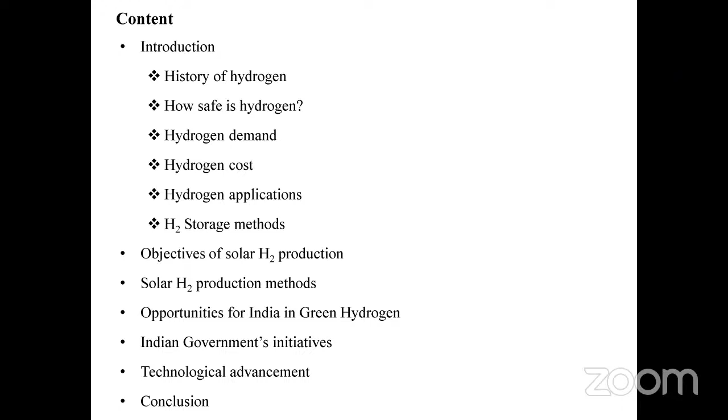Coordinators have given me responsibility to cover this topic, the solar energy in hydrogen production. Before that, I know most of the fundamentals have already been covered, so I will talk for about 60 minutes. Dr. Vishwanath, you have given me 60 minutes now, right? Yes, sir. Okay, so within 60 minutes, I would like to try to cover some basic things, and some technology involved, in fact the technology of solar energy involved in hydrogen production.

Right? Yes. Okay, so I would like to cover a brief history of hydrogen, how hydrogen is safe, hydrogen demand, hydrogen costs, briefly, since most of these things have already been covered in the last 5 days. This is the last day, and this is my talk in the last session of this short-term training program.

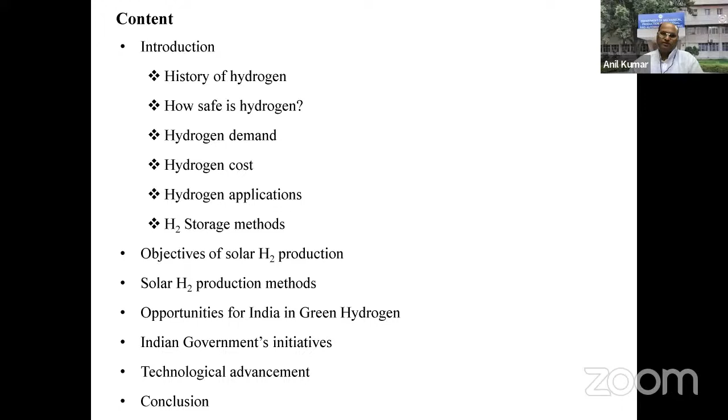So the objectives are: solar hydrogen production, solar hydrogen production method, opportunity for India in green hydrogen, India government initiative, and technological advancement. I have included some case studies also. I'm not sure whether I will be able to complete all this within 60 minutes.

The hydrogen production and development has occurred over the last 2 centuries. In the 16th century, Paracelsus from Switzerland discovered this gas was formed between sulfuric acid and iron. Myelin from Switzerland in the 17th century observed the gas burning. In 1761, Robert Boyle produced hydrogen by reacting iron filings with dilute acids. Further, in 1776, Henry Cavendish identified hydrogen as a unique substance and placed it in the chemical table. In 1783, Lavoisier produced hydrogen, and in 1788 he named the material hydrogen, which is a Greek word.

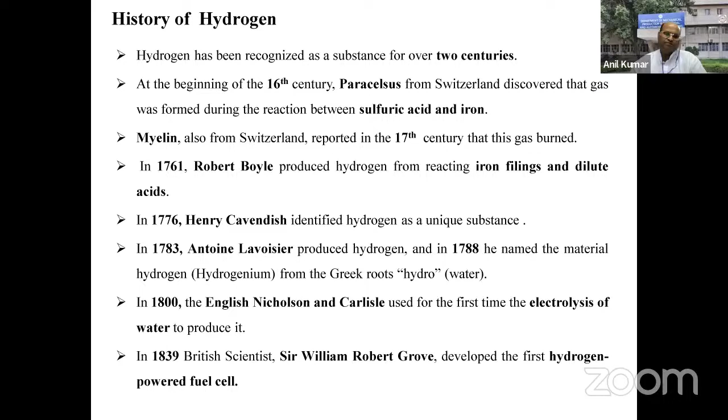Further, the English scientists Nicholson and Carlisle used electrolysis of water for the first time. This was the breakthrough. Further in 1839, British scientist William Robert Grove developed the hydrogen-powered fuel cell. This was the hydrogen production side so far.

Regarding the application point of view, Count Ferdinand of Germany used hydrogen in balloons. The first balloon was in 1900 that used hydrogen to maintain the buoyancy of the airframe. Airships to cross the Atlantic were put into service during the 1920s and 30s. NASA also first applied hydrogen energy in 1958 to pursue space exploration, making a great historical contribution to hydrogen use.

So people have been using hydrogen for a long time, and now because of the fossil fuel crisis, along with environmental degradation, people are attracting towards renewable energy sources. The renewable energy source and hydrogen - as we know, hydrogen is one of the fuels with the highest calorific value, around 120-142 megajoules per kg.

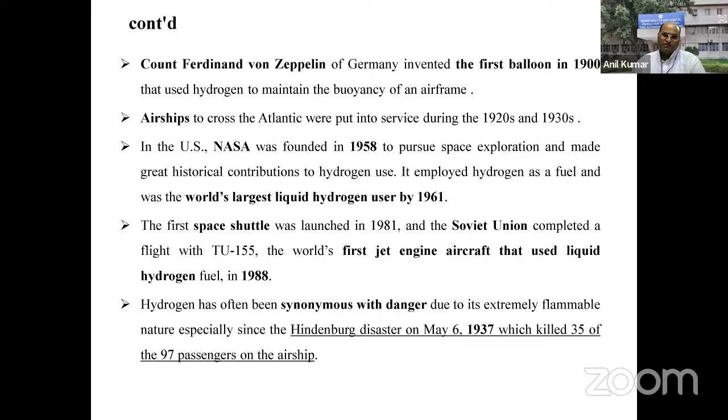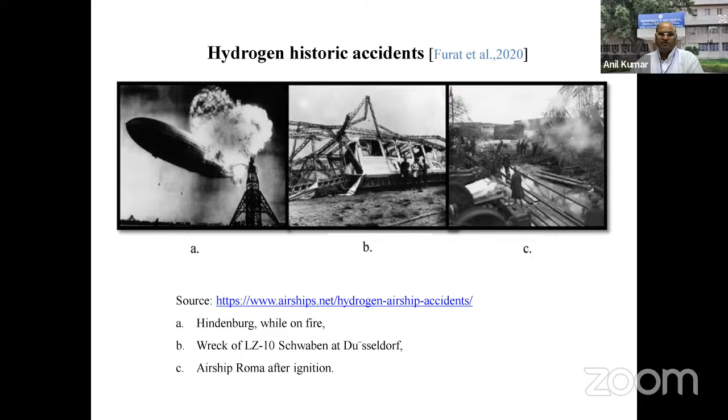At the same time, some accidents occurred. People just think hydrogen is synonymous with danger due to its extreme flammability, especially the Hindenburg disaster in 1937, where almost 35 passengers out of 97 were killed in this airship. Because of this, people have some fear regarding the utilization of hydrogen. Of course, it is very highly flammable, but at the same time it has some good qualities also - it is very dispersive compared to other fuels. These were the Hindenburg while on fire, and the airship Roma - these are some accidents that occurred.

So how does it compare? As we know, it is non-toxic and much lighter, and very dispersive. It dissipates rapidly when released, allowing relatively rapid dispersal of fuel in case of a leak, making it relatively safer than other fuels. The primary safety concern is about leakage and undetected gas collecting in a confined space, which can eventually ignite and cause explosion. If the space is confined, only then does it have this explosion problem.

Through a thorough understanding of hydrogen properties and designing safety features, as more hydrogen applications develop, that fear is going away. People are taking initiatives for developing hydrogen fuel based applications. Training in safe hydrogen storage and handling practices is the key element for ensuring safe use of hydrogen. As per the US Department, as more hydrogen demonstrations get underway, hydrogen safety reports can grow and build confidence. By using it, we can develop our confidence regarding hydrogen being a safe fuel.

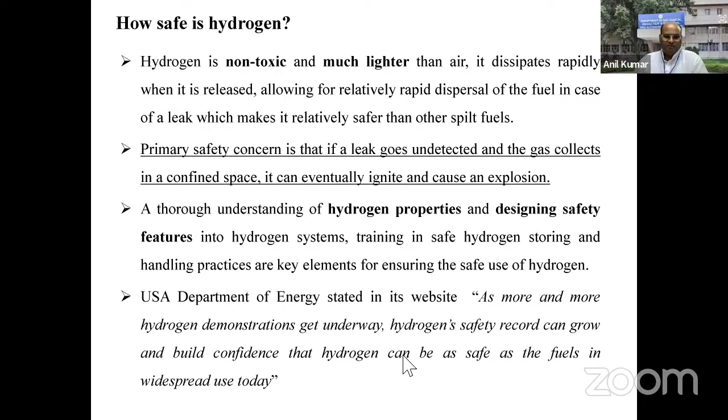And ammonia has a lot of industrial applications, and one of the most important applications of ammonia is fertilizer. Okay, right. So hydrogen demand is increasing every year, and it is widely used: ammonia production 51%, oil refining 31%, and methanol production 10%, remaining 8% other uses, right?

So recently most of the developed countries are using hydrogen as a transportation fuel, and in India also IOCL has taken this initiative. One hydrogen passenger vehicle is running on hydrogen fuel only. H2 is being used in a fuel cell to generate electricity, with water vapor as a byproduct. However, at low capacity, the water vapor will immediately disperse.

But at large scale, we can have water itself as a byproduct, like for the production of biodiesel, we have glycerin as a byproduct, and glycerin has many applications. In a similar way, the water problem can be solved in large-scale applications of this hydrogen fuel cell. So considering the future need and demand of H2, it is important to find, okay, our main aim is to find the route where the production cost is reduced, right?

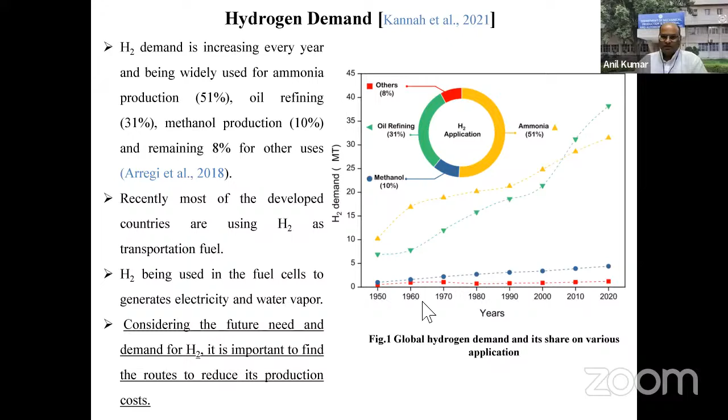Okay, so global energy demand keeps on increasing because of a lot of infrastructure development all over the world, especially in developing countries. More and more industrialization, and easier transportation facilities, mean more and more energy consumption. In any country, per capita energy consumption increasing directly reflects the prosperity of that particular country, right?

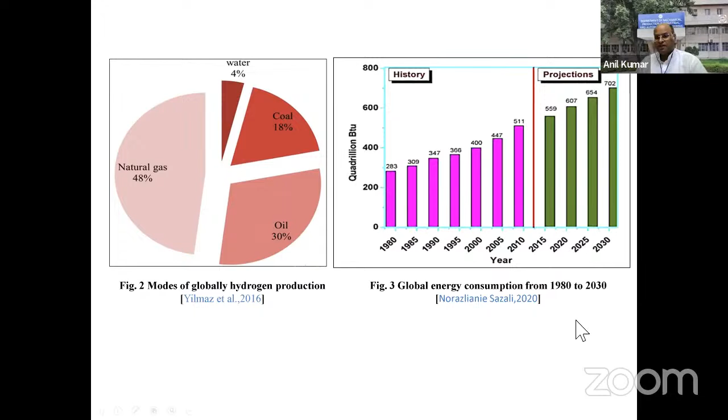So in the coming time, the demand for energy will definitely increase. And we have limited resources. Fossil fuels are very limited, and at the same time they degrade the environment. So we have to find some other solutions. A lot of work has already been done on renewable energy, and all the technologies are quite mature, whether solar, wind, biomass, or other kinds of technology.

Okay, so those renewable energies we can use for the production of hydrogen, right? So electricity produced from nuclear energy, solar photovoltaic, hydropower, wind power, that electricity we can use for the electrolysis process to produce hydrogen. Other forms of renewable energy, like solar thermal, for the thermal cracking process. Biomass is another very promising raw material for production of hydrogen.

In biomass energy conversion, anaerobic digestion is a process for production of biogas, where methane is the main constituent, right? So we can convert the methane into hydrogen, extracting hydrogen from the methane itself, with the help of these energy sources. Another method is gasification, right? There CO and H2 are the main constituents, so we can extract the H2 from that syngas.

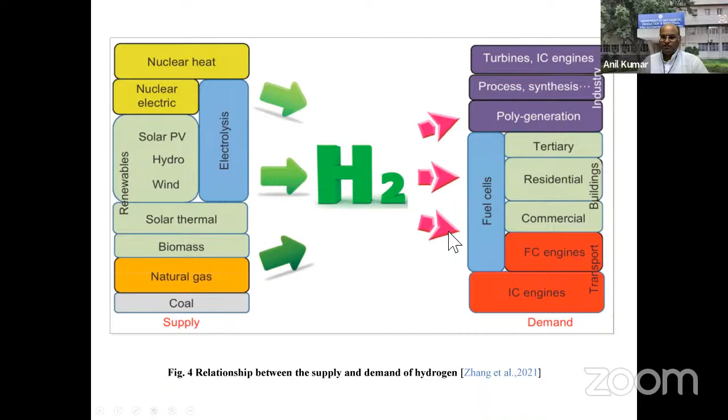Okay, and the fuel cell energy, and this hydrogen we can use for transportation purposes, in the form of fuel cell based engines, or IC engines also. Modified IC engines we can use for hydrogen. We can use hydrogen as a fuel for these modified IC engines, right? So

as we know, H2 will play the key role in shifting the global energy system toward a sustainable energy system by 2050. The Hydrogen Council has documented that hydrogen energy has grown drastically in 2020, and it has the potential to unlock 8% of the global energy demand with the production of

2.5 USD per kg. And this is our prediction basically, and in fact, the cost of production of hydrogen varies from 0.8 to 4 US dollars per kg worldwide. And by 2030, the hydrogen production cost is expected to reduce to 1.8 USD, and it can unlock up to 15% from the 8% of the global energy demand. And the cost varies.

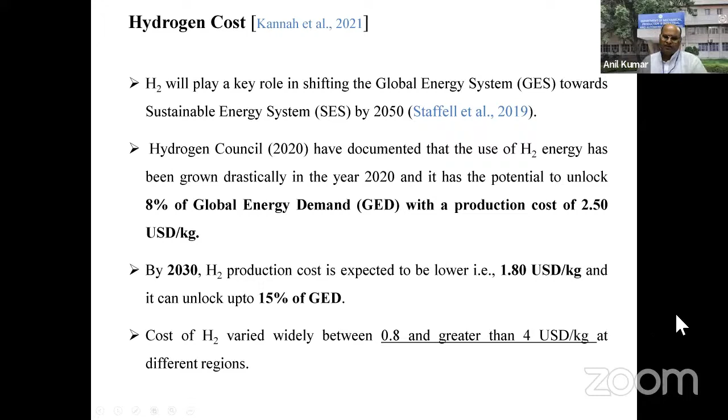Just look over here. This is basically the cost of hydrogen in the different regions, right? In all the regions like North America, Europe, Africa, they are classified into the southern, eastern, central, western, and northern parts of these continents. Just see over there. The lowest hydrogen generation cost is around 0.8, here in South America. In South America it varies from 0.8 to 3.6 USD per kg right now, right?

So in this way, hydrogen production is taking place worldwide, and scientists are very keen to develop hydrogen production at lower cost, whatever is possible, right? So now just look over here. The major hydrogen consumption is in Asia and the European countries. The highest H2 consumption is in Europe, then Asia, then America, then Africa, then Australia, right? And further, Asia and Europe we can split into eastern, western, southern, northern, and west central parts, like this, right?

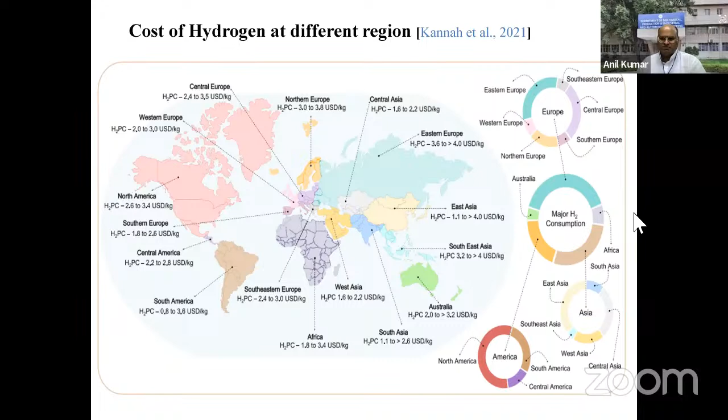So this variation in the cost of production of hydrogen is based on the availability of raw material in that area, and the labor cost. Many costs are affected. You can see the parameters involved in the cost analysis: operational cost, cash flow, hurdle metrics, total capital investment, direct and indirect capital cost, and equipment cost. Under direct cost: instrumentation, control, pipeline, electrical system, building, the installation factor. Under indirect: engineering and supervision, construction, legal expenses, contractor, contingency, and the equipment cost: design, transportation, installation. Our ultimate aim is to reduce the hydrogen production cost and improve plant profitability and comparative economics, right?

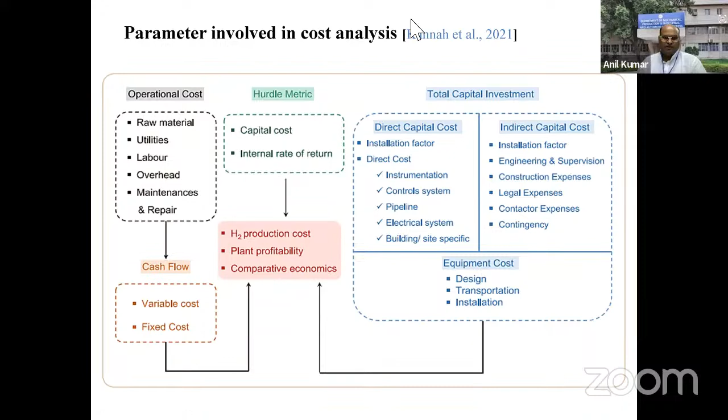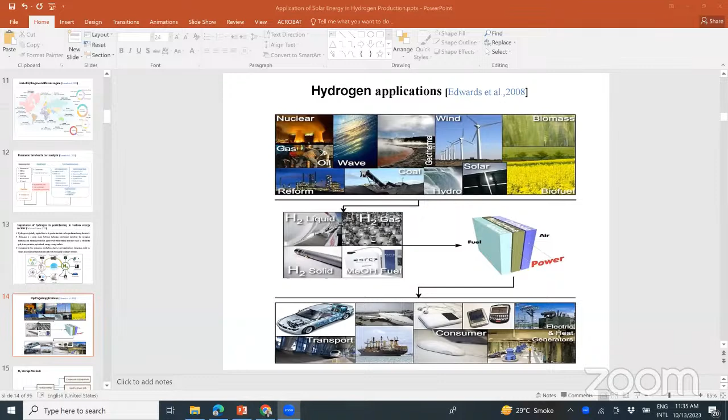Am I audible? Your voice is breaking. Am I audible now? Now it's clear, sir. Am I audible, Dr. Vishnu? Yes, sir, audible. Very sorry, I was disconnected. No issue, sir. Please.

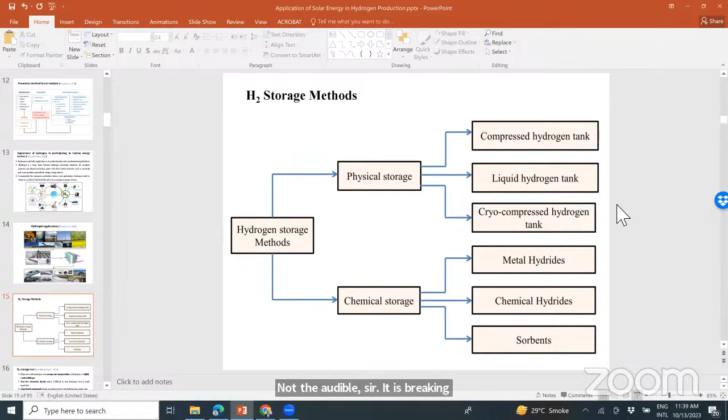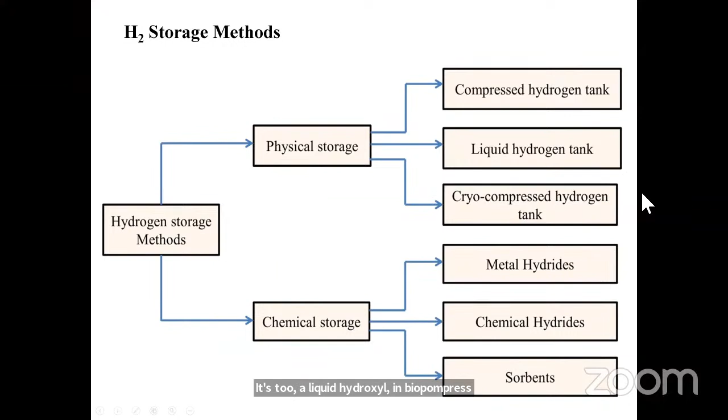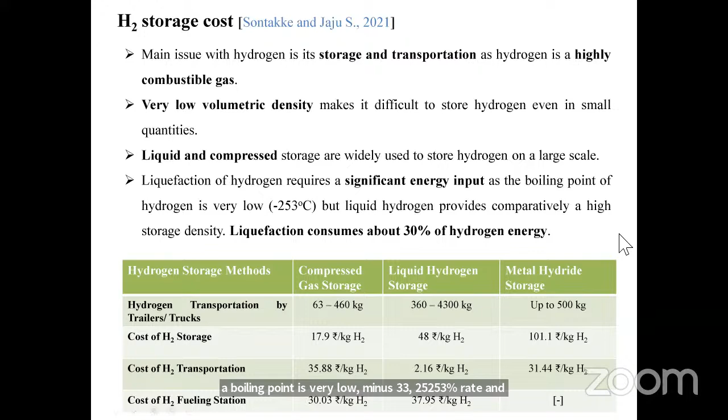Liquid and compressed storage are widely used to store hydrogen at large scale. In fact, liquefaction of hydrogen requires significant energy input, as its boiling point is very low, minus 253 degrees centigrade. But it provides comparatively very high storage density. The liquefaction consumes 30% of the hydrogen. And there are some risk and security issues also.

Hydrogen has a better coefficient of diffusion and lower density, much safer than other known fuels. Okay. In addition, the high specific heat of H2 efficiently reduces the temperature increase for a certain heat input. The gaseous fuel has very light density, only 6.9% of the air density. So it is more dispersive compared to air, and therefore the gas quickly diffuses from its source, and the risk is lower. Only if there is a confined space is it much more dangerous. Otherwise, it is very dispersive.

So this is a good quality, the safer side, we can say. Leakage of hydrogen is not responsible for damage to the climate. It is non-toxic in nature and is not responsible for any climate degradation if leakage is there. Only explosiveness is definitely a major concern.

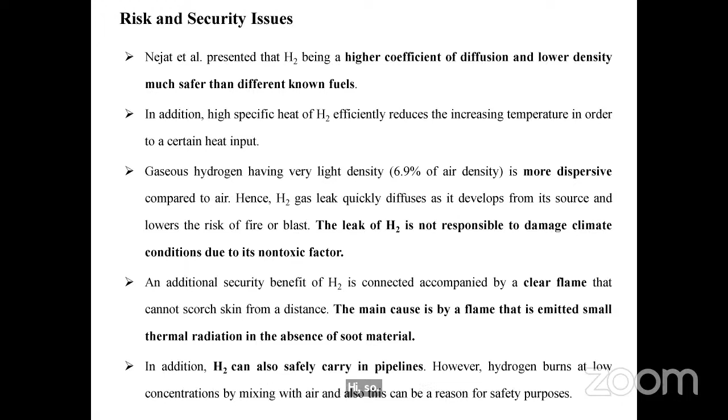An additional security benefit of H2 is that it is accompanied by a clear flame and cannot scorch skin from a distance. The flame emits small thermal radiation in the absence of soot material, right? If we burn kerosene or some other fuel, soot is there, and with diesel, soot formation is a major problem, right? So H2 can also be safely carried in pipelines for safety purposes.

So why do we want to use solar energy for hydrogen production? As we know, there is overburden on fossil fuels, and due to more utilization, of course they will decline over a few years. Renewable energy sources are fully developed, accompanied by advancement of production methods and sustainability. Conversion technology of renewable sources into useful energy is now very mature. Solar, wind, biomass, and in solar, solar thermal and solar photovoltaic, these are very mature technologies.

So the electricity generated, or directly the heat energy from the sun, we can use for H2 production, and there is no harm to the environment. It is totally environmentally friendly. Production of hydrogen using solar energy is very protective of the environment. No greenhouse gas is generated during operation. However, during manufacturing of solar energy conversion devices, whether solar photovoltaic or solar thermal systems, it definitely produces some greenhouse gases during fabrication, right?

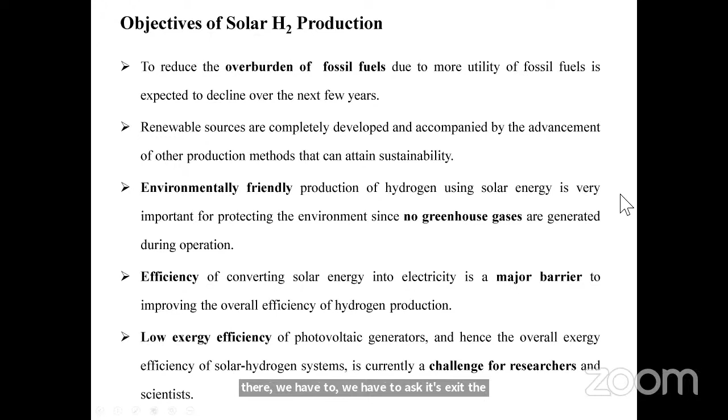And one more thing, 99% of hydrogen production is generated with natural gas and fossil fuel, as we have seen in the previous slide. The rate of hydrogen production is nearly 50 million tons globally, which denotes only 2% of the energy demand.

The cost of hydrogen production is still high: $2 USD per kg for coal gasification, and $7 USD per kg for solar hydrogen through solar photovoltaic and water electrolysis. There we are utilizing solar electricity in the electrolysis process. So we can hope it will reduce.

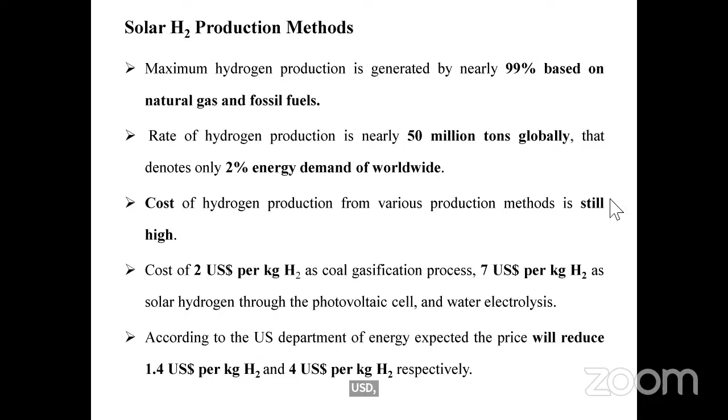It can be reduced to 1.4 USD per kg for coal gasification and 4 USD per kg for solar hydrogen. That means it can drop from 2 to 1.4 and from 7 to 4 USD per kg. That is only possible through the advancement of technology, right? We have to identify where the losses are.

We can classify hydrogen production from solar energy. Solar hydrogen production methods can be classified into photochemical, that is photovoltaics, thermochemical, and electrochemical processes. In photovoltaics, basically most of

Yeah, I have another 15 minutes.

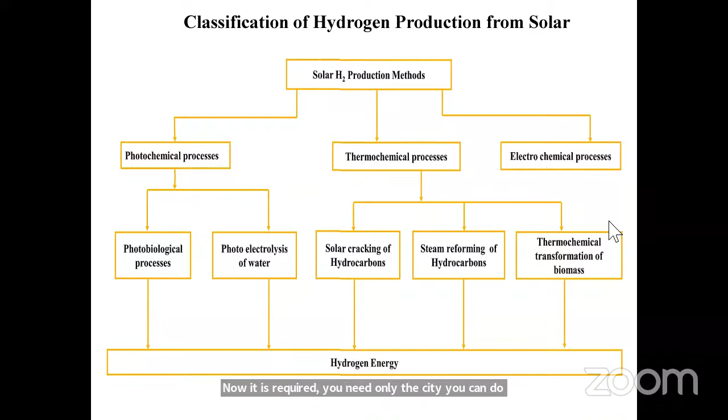Solar photovoltaic energy we can use for photoelectrolysis of water, and thermochemical processes: solar cracking of hydrocarbons, steam reforming of hydrocarbons, thermochemical transformation of biomass. These three technologies need more advancement and research compared to photoelectrolysis of water, which is very simple and quite mature. You only need electricity for electrolysis of water. And this is the electrochemical process. We can discuss this.

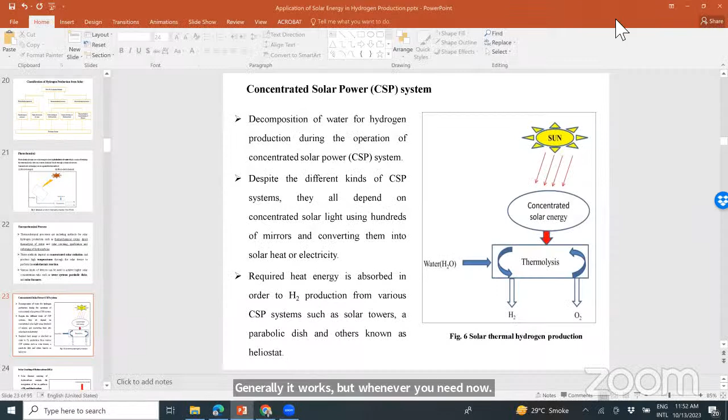Anil said, yeah, it's not shared, sir. Screen is not shared. Just now only it went. Just now. Okay. Just a minute. Sorry for this interruption. No problem, sir. Generally it works, but whenever you need it, then only technology fails. Now, is it working? Yes, sir. Yes. Sorry. Okay.

So basically, in the thermochemical process for hydrogen production, these are some methods: the thermochemical cycle, direct thermolysis of water, solar cracking, gasification, reforming of hydrogen. And these methods need high temperature, and high temperature we can produce with the help of concentrated solar radiation.

So for concentrated solar radiation, as I told, various conversion devices are there. The parabolic trough collector, PTC, is there. Then parabolic dish is there. Then the tower type solar energy conversion system, which is the heliostat. Many mirrors are spread on the land, and they are focusing on a certain point to create the high temperature.

And in fact, we can easily achieve temperature in the range of 700 to 800. The 700 to 800 degree temperature is our requirement for these processes: thermochemical process, solar cracking, gasification. That temperature is more than enough for us. Okay. And basically it is an endothermic reaction. So the method depends on the solar concentration and high temperature through the device, and various kinds of solar devices.

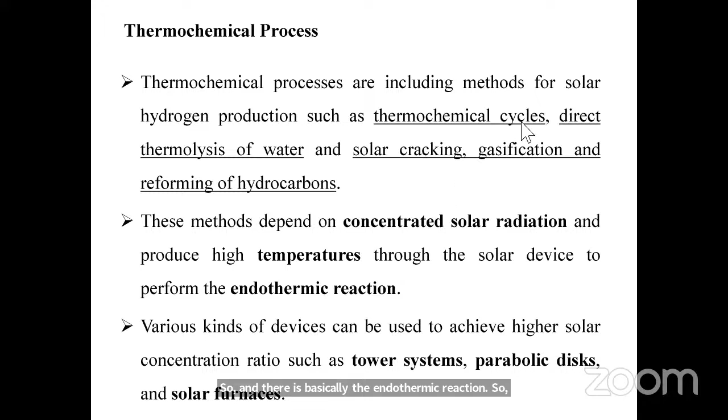And now the solar radiation falls on the concentrated solar energy system, where high temperature heat is produced, and water is supplied and by thermolysis gives hydrogen and oxygen. So decomposition of water for hydrogen production during the operation of CSP. Despite the different kinds of CSP system, they all depend on high concentration using hundreds of mirrors.

In fact, the concentration ratio is a very important thing for the CSP system; the higher the concentration ratio, the higher the temperature you are able to produce. It is defined as the ratio of the aperture area through which the solar radiation is falling, divided by the absorber surface area. So roughly, if the concentration ratio is 1500, you can easily achieve a temperature of 1300 to 1400 degree centigrade.

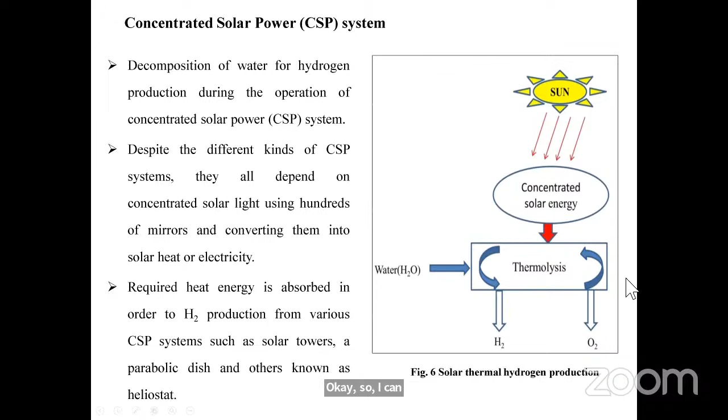So the required heat energy is absorbed for production in the various CSP systems: solar tower, parabolic dish, and like this. Now in solar cracking, the high temperature heat is applied to the solar cracking system. Cracking we can do with catalyst and without catalyst also. We are supplying hydrocarbon here. Solar thermal cracking of the hydrocarbon is a co-synthesis process, and black carbon is the byproduct, useful for many industries. So along with hydrogen, nothing is wasted.

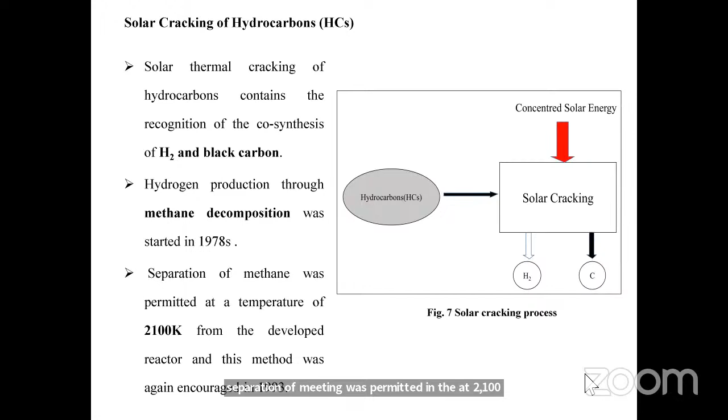Hydrogen production from methane decomposition was started, and separation of methane was performed at 2100 Kelvin in the developed reactor, and the method was again in 1999. And now this is basically the steam reforming process. In steam reforming, again high temperature heat is applied to the feedstock, such as propane, butane, methanol, jet oil, diesel, naphtha.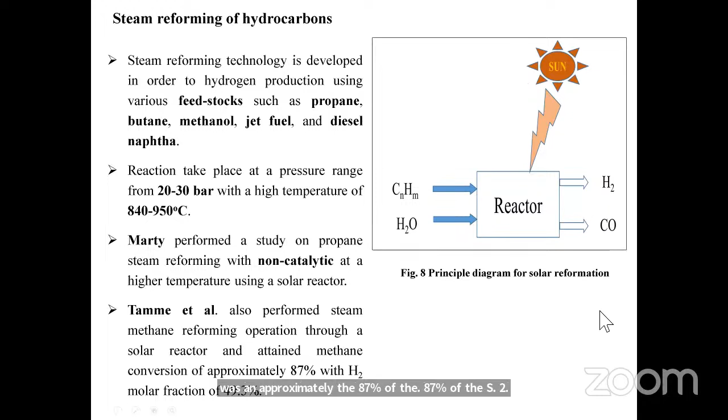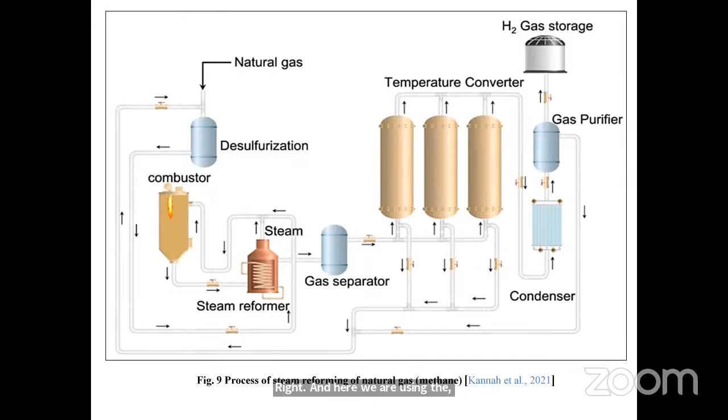Here we are using solar energy, which is utilized completely. Basically we need heat energy, so for the generation of temperature in steam reforming, 800 or 900 degrees centigrade, we can easily achieve that temperature. In the thermochemical transformation of the biomass process, as we know, this process is again very simple.

Biomass is constituted of cellulose, hemicellulose, and lignin. It is dried with the help of solar heat.

For the drying application, we can use low temperature solar energy thermal technology. These are the solar air heater flat plate collectors, which can be used very easily, and we can achieve temperatures in the range of around 100 degrees centigrade.

If we want more temperature for drying at a higher level, we can use evacuated tube collectors or Fresnel lens collectors for the drying purpose.

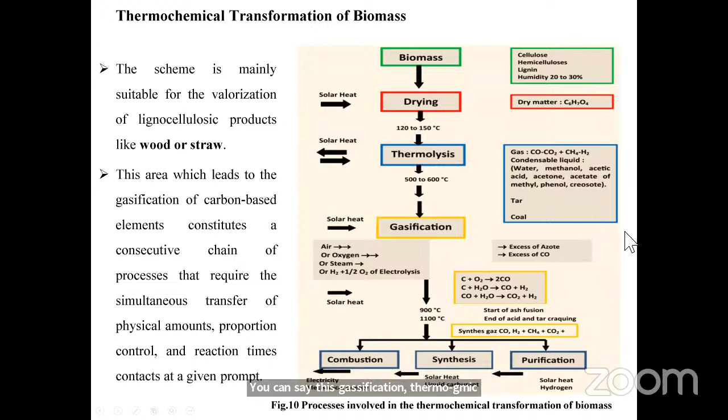This process is basically involved in the thermochemical transformation of biomass to hydrogen system. This is also a very mature technology now.

Now, the electrochemical process: Grigoriev et al. reviewed the electrolyzer, PEM (proton exchange membrane), and showed various technologies. Water electrolyzer was found to be one effective technology to produce pure hydrogen. Agbli already established a graphical model of the electrolyzer's macroscopic and energetic nature. The main commercial advantages of electrolytic hydrogen production are scalability and zero emission of hydrogen in this electrochemical process.

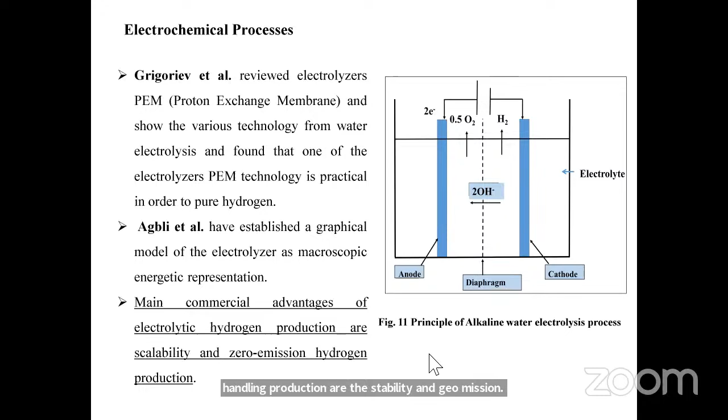Now I would like to summarize this solar hydrogen production method. Of course, efficiency is lesser; the efficiency of converting solar energy into electricity is a barrier to improving overall efficiency. Instead of converting to electricity needed for the electrolysis process, it is better to use direct heat produced by the solar energy, with the help of solar energy conversion devices like CSP systems. High temperature methods require additional material.

So the material which can sustain at high temperature, because high temperature oxidation occurs, that technology is already developed, but it's not cost effective. So we can work on material development for cost effective materials which can sustain at very high temperature.

So for high temperature, definitely it is focusing on the high temperature membrane, of course, and the heat exchanger for the solar process.

Global solar hydrogen system mainly consists of the solar hydrogen systems for transport and stationary application. It is totally environmentally friendly production of hydrogen using solar energy, very important for protecting the environment, since no greenhouse gas is generated during its operation.

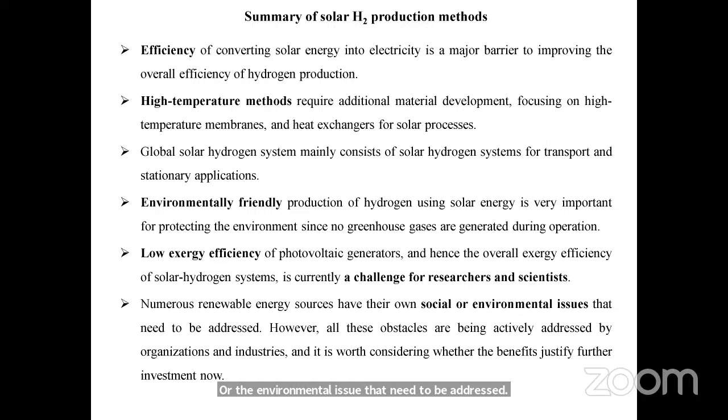So many people have already worked on solar based hydrogen production, and sources you see over here, concentrated solar power, CSP. Worldwide, look at over here - Cameroon, an African country, Turkey, China, Spain, Switzerland, India, and all over the globe, solar energy based hydrogen production - people are actively working on this.

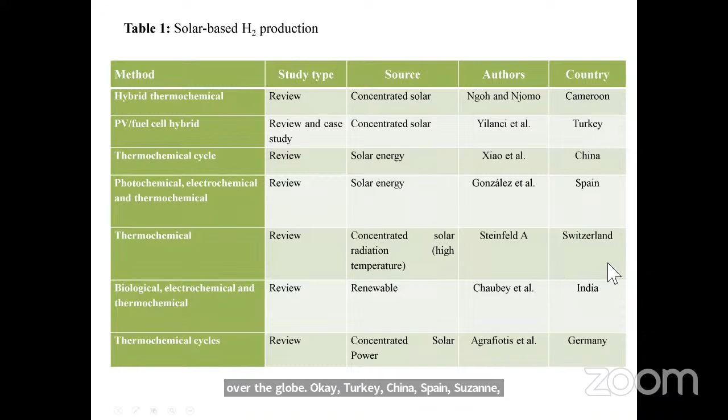So look at just and see this efficiency, this thermochemical solar energy process, and this is basically energy efficiency, it is not exergy.

Exergy efficiency is not more than 2%, 4%. Okay, this is energy efficiency. Then electrolysis—of course with electrolysis, particularly that part of the system, the exergy can be higher, but in the overall system the exergy is lower.

Thermochemical energy efficiency is 20%. In thermochemical Cu-Cl photocatalytic, the energy efficiency varies from 46 to this range. Now look over here at the thermochemical electrolysis process—the efficiency is higher there. In plain thermochemical it's lesser, meaning energy efficiency is around 20 to 28.

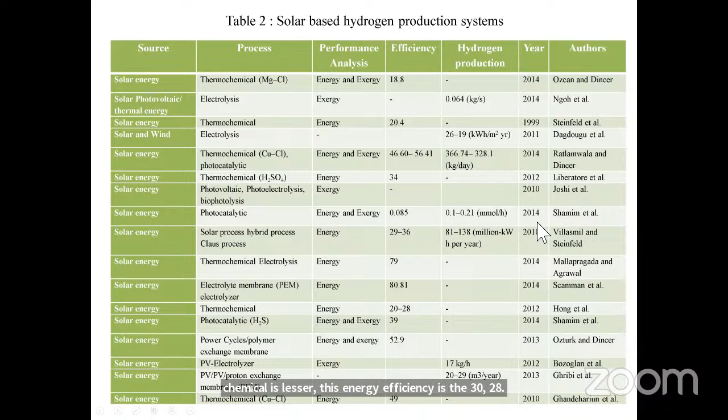A lot of work has occurred in the last 20 years, or two decades, in the case of solar hydrogen production systems.

In India, we have a lot of opportunity to produce green hydrogen. Green hydrogen will definitely help provide a sustainable solution for the Indian transport sector. Transport fuel is a major requirement, and it's also one of the major components of environmental degradation. So if we could do something in the Indian transport sector with solar-based fuel, whether green hydrogen or other kinds of fuel, utilizing solar energy and supplying it to the Indian transport sector will definitely be helpful.

The Energy and Research Institute, TERI, based in Gwal Pahari and at the Habitat Center in Delhi, predicted that hydrogen demand will increase from 6 metric tons to 28 metric tons by 2050, with the cost of renewables falling by 50%. So we can hope the cost of hydrogen production with solar energy will reduce in the near future.

TERI claims about 80% of hydrogen in India will be produced from renewables by 2050, because the Government of India is taking a lot of initiatives for promoting hydrogen production from renewable energy sources. Under the Make in India program, the government has already fixed opportunities for production of electrolyzers and fuel cells, which will allow capturing a large share of this market worldwide.

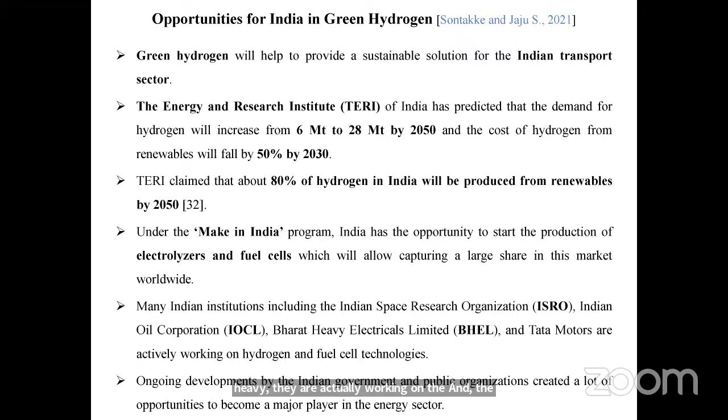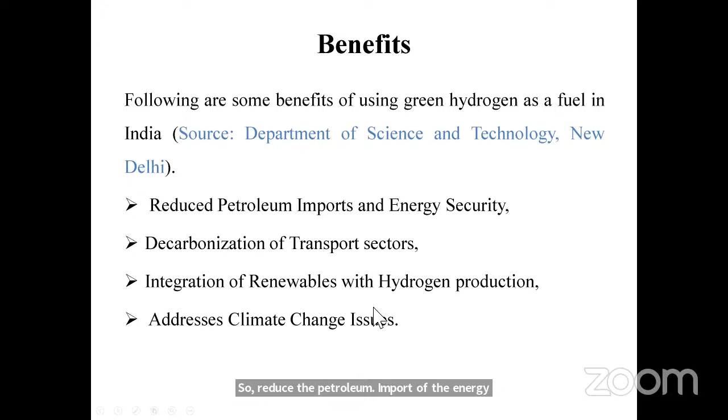The ongoing development by the Indian government and public organizations creates a lot of opportunity to become a major player in the sector. Overall, these are the main benefits from green hydrogen, or solar energy: reduced petroleum import, energy security, decarbonization of the transport sector, integration of renewables with hydrogen production, and addressing climatic issues.

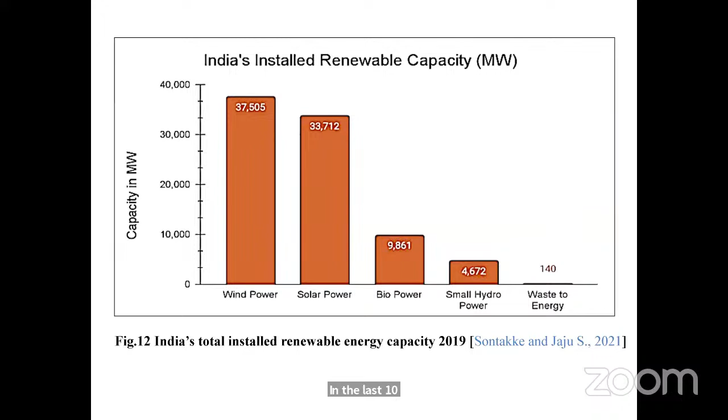Right now we are lagging behind in hydrogen refueling stations, having only two: one at NISE, the National Institute of Solar Energy, and another at the Indian Oil R&D Center in Faridabad. Look at Japan, where this initiative has already developed hydrogen refueling stations—this directly reflects their technological advancement and work in the area of hydrogen application for the transport sector.

So China also, along with United States, Germany, and Japan, are very much ahead of us. We have to do a lot of work in this direction.

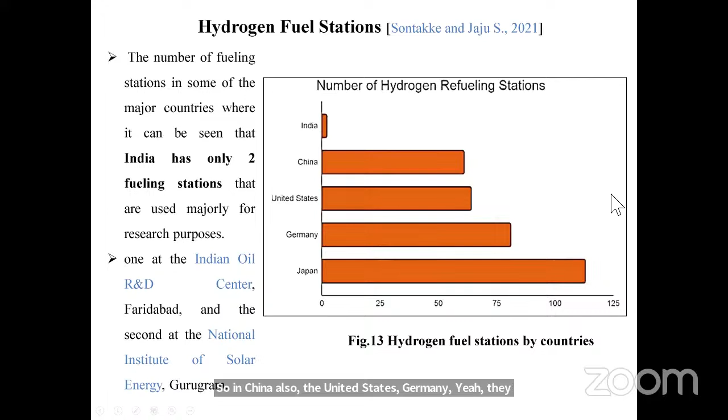The Government of India has taken sufficient initiatives and has keen interest in the production of green hydrogen, and they have set up a mission called the National Green Hydrogen Mission, to become a major exporter of hydrogen, with an incentive plan of $2.11 billion. This initiative is a strategic intervention for the green hydrogen transition program.

Under this program, the SIGHT mechanism's main focus is the manufacture of electrolyzers, with a target to build a capacity of 60 to 100 gigawatts in India. This is a good initiative and, in fact, a good target, and I hope we will definitely achieve it. By achieving this target, the cost of producing hydrogen will definitely come down.

And this region, capable of producing and utilizing large-scale hydrogen, will develop as a green hydrogen hub. This strategic intervention for the green hydrogen transition program has 3 phases. In the first phase, establish the policy and guidelines and initiate the pilot projects between 2022 and 2024. The next phase is to bring down the manufacturing cost, promote incentives for large-scale production, and scale up the production of green hydrogen. Within 1 year we have to achieve this target. The third one is the focus on distinctive hydrogen application.

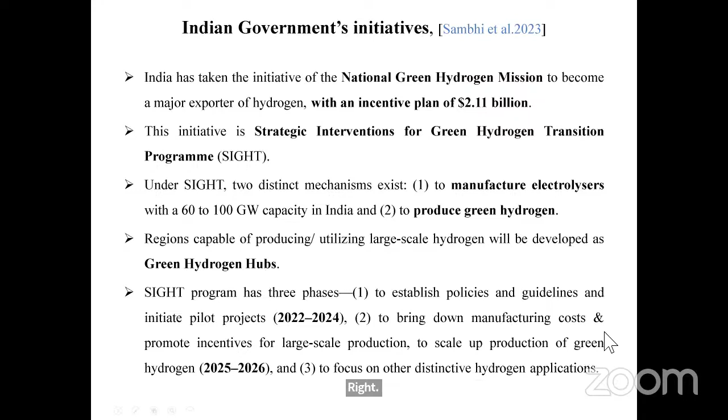So, solar hydrogen production: just have a look at this, the energy and exergy efficiency. This dotted part is the exergy only. And this means energy and exergy efficiency with respect to the solar radiation. And this 1000 is not possible; it is possible, but only under certain conditions, when 1000 watt per meter square solar radiation is there. So this is the energy efficiency of solar radiation and conversion efficiency.

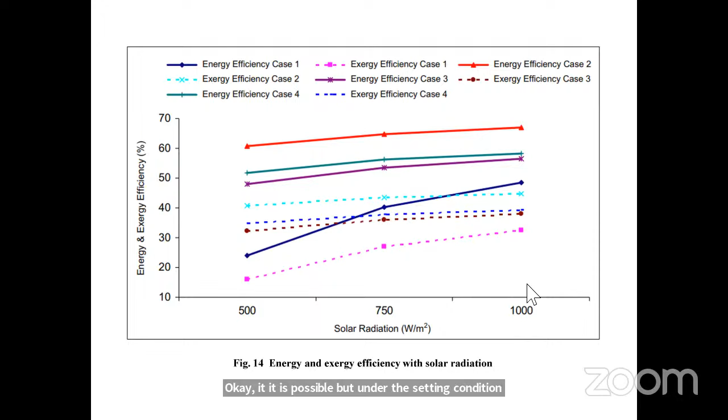Now just look here at the overall efficiency. This is energy efficiency minimum and energy efficiency maximum. This red part is solar thermal hydrogen production, and the PV hydrogen production is the blue part. The energy efficiency is lesser in the case of the solar photovoltaic system. However, look here, the exergy efficiency in the case of thermal is lower; the actual useful energy is lower than the exergy in the case of PV hydrogen.

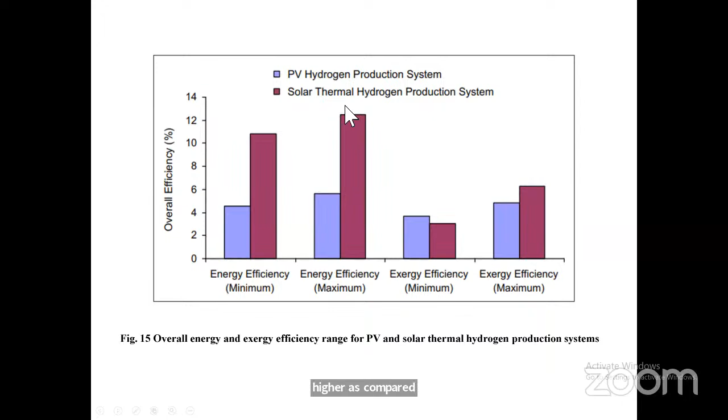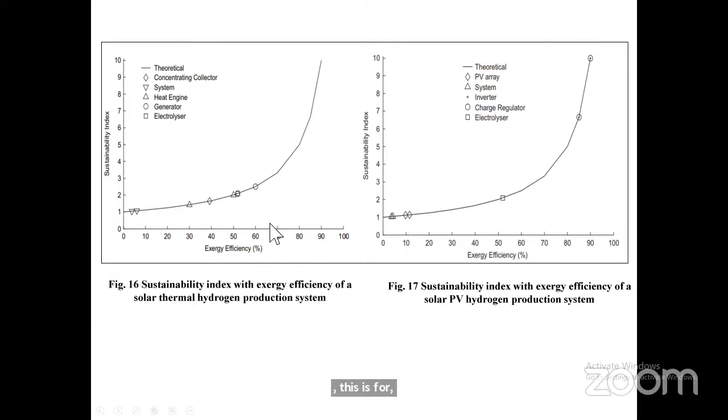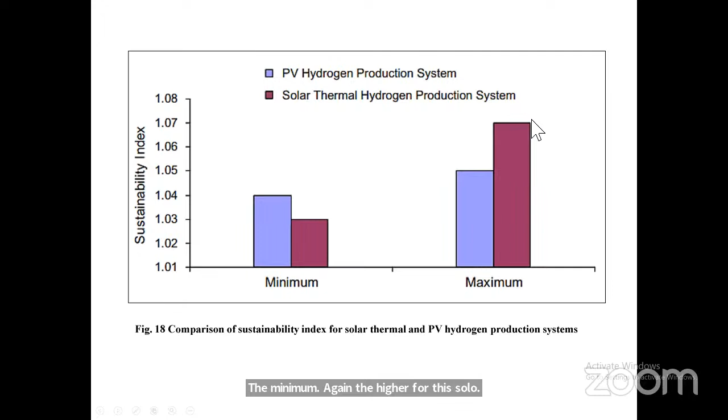This is the sustainability index. Just look here. This is the sustainability index for the exergy efficiency of solar thermal hydrogen production, and this is the sustainability index for the exergy efficiency of the PV system. The minimum is again higher for solar photovoltaic, and the maximum value is higher for solar thermal. So this is the sustainability index, and with this I can conclude.

How much time do I have, Dr. Vishnu? I think I should stop here. Yes, sir. Yes, sir.

So two routes of hydrogen production, namely PV and solar thermal systems, are studied based on the energy efficiency and sustainability index. The case study presented and analysis evaluated them. The exergy efficiency of the concentrating collector is an important parameter to evaluate the exergy efficiency of solar thermal hydrogen production, as it fluctuates with the intensity of solar radiation. So the minimum value was higher in the case of the solar photovoltaic system. This is one of the main factors: the solar radiation fluctuates with time.

Both PV and solar thermal production systems are environmentally friendly during operation. Energy efficiency increases with increasing radiation. The energy efficiency of the system is higher than the exergy, as expected. Energy efficiency is based on the first law of thermodynamics; however, exergy efficiency is the second law, the actual useful energy we are considering here. So the solar thermal hydrogen production system has higher sustainability because of the higher exergy efficiency as compared to PV hydrogen production.

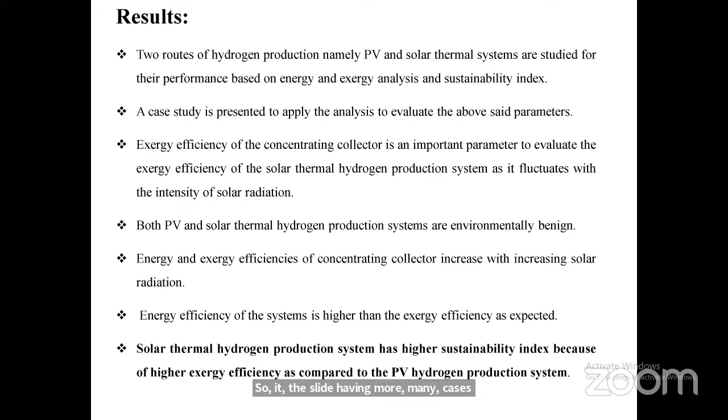These slides have many more case studies. I will provide the complete set to Dr. Vishnath. Many things are there to discuss, but I couldn't because of the time constraint.

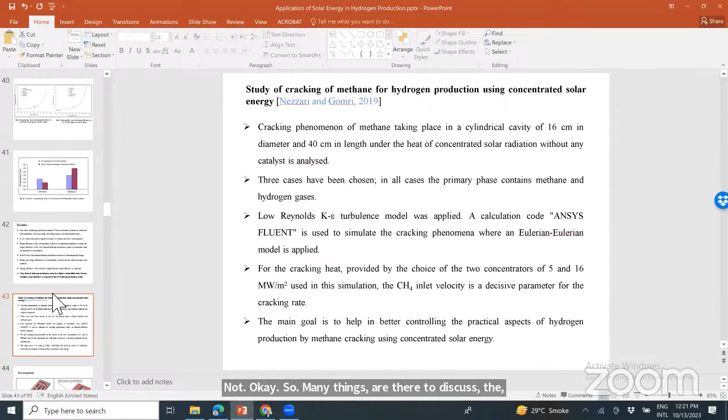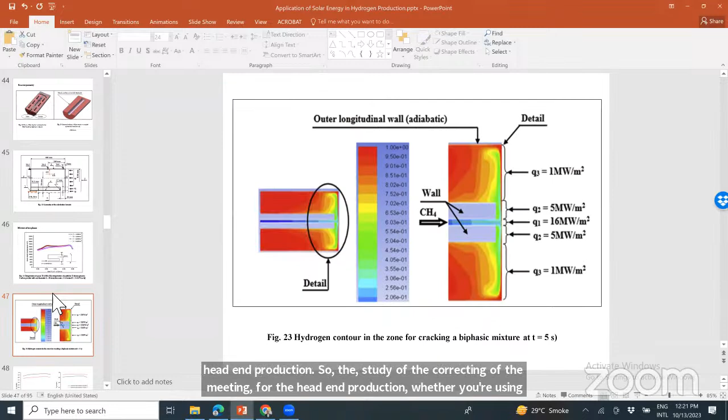So there is a solar study of the cracking of methane for hydrogen production using this concentrator. CFD modeling is there; a lot of scope is there for numerical analysis with this system. And one of my students is working on steam reforming, the solar energy application in steam reforming modeling. He is doing modeling only, because we couldn't manufacture or fabricate that reactor, and he's a part-time fellow.

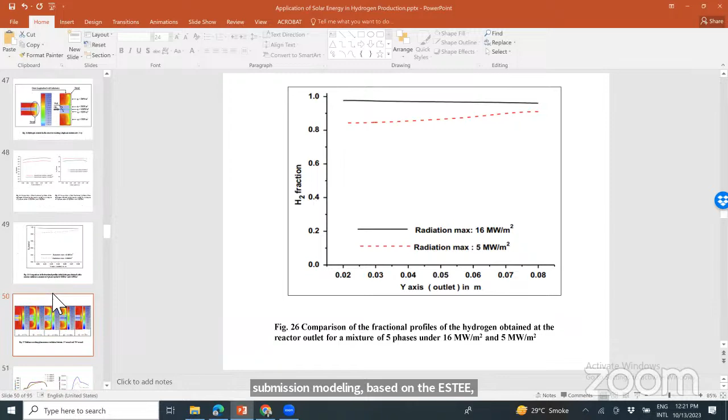Very soon you will find a good research paper based on the simulation modeling based on steam reformation or based on solar energy in the International Journal of Hydrogen Energy. So there are a lot of things. So this is technological advancement that we can do. This is a very good system, and in fact the students who are interested can replicate such kind of system.

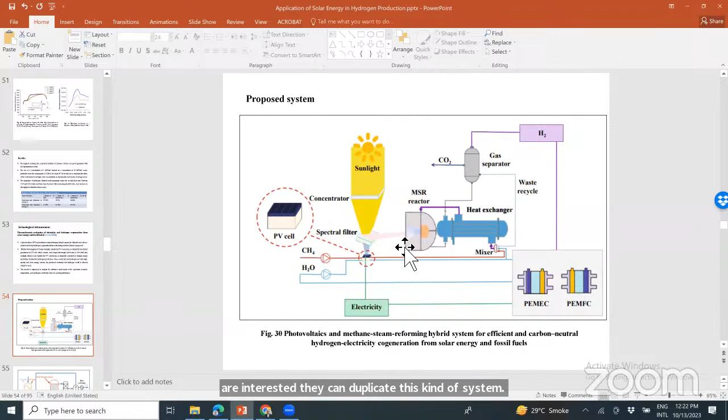So over there is the sunlight concentrator. This is a spectral filter because you need only the visible range. Other than the visible range is creating the high temperature, and that is adverse on the efficiency of the PV cell. The CH4 and water you can supply over there. Okay, no, sorry. Over there the electricity is produced by the PV cell only.

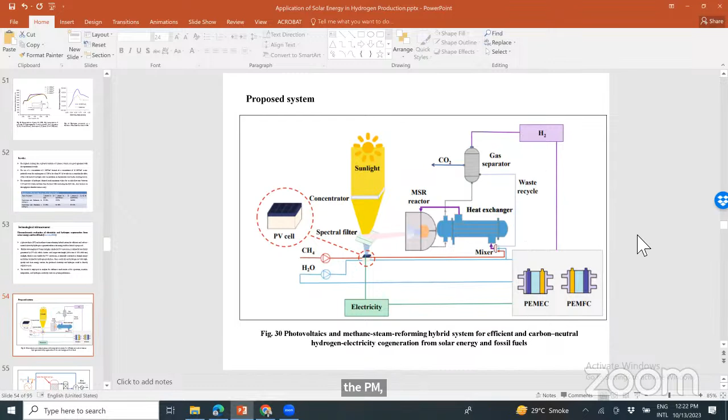So over there you can use this reactor, the heat exchanger, and all this. And this is a PEM, proton exchange membrane fuel cell. Students can duplicate this simulation modeling of such kind of work. So many other things are there to discuss, but I should stop over here, right? So, Dr. Vishnath or coordinators, over to you.

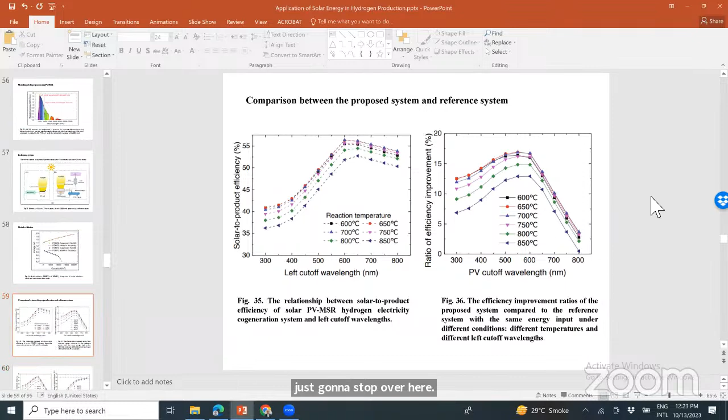Yes, sir. I think you can switch on your video, sir. Oh, sorry. Actually, it always works, but today I don't know what happened. Maybe there is some network issue in the middle. That's the reason. Yeah. So I request the participants to ask questions to the speaker.